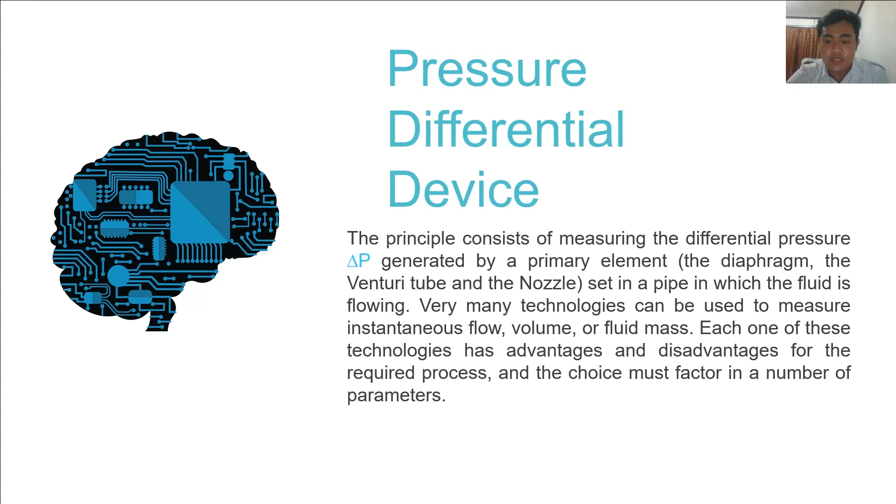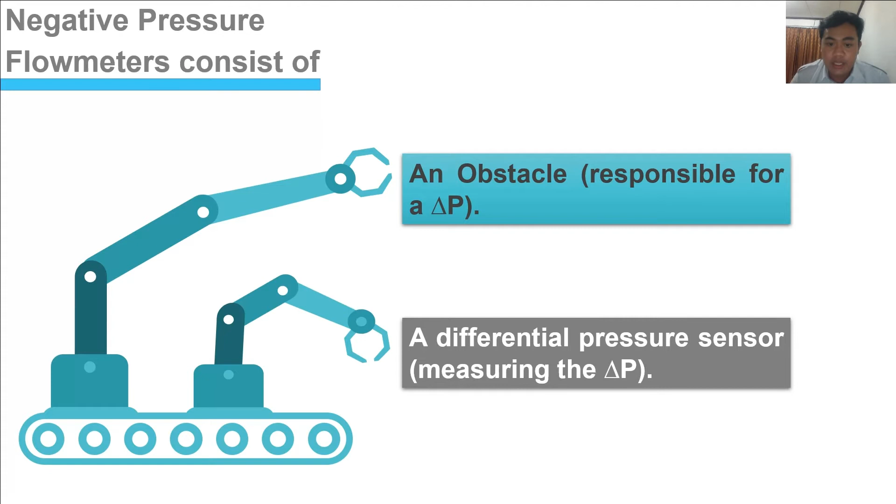A differential pressure flow meter consists of two: an obstacle responsible for delta P and a differential pressure sensor measuring the delta P. This is the advantage and disadvantage of a pressure differential device. They do not require calibration as long as they have been designed in compliance with the established standard, and they have no moving parts, and therefore they remain reliable over time.

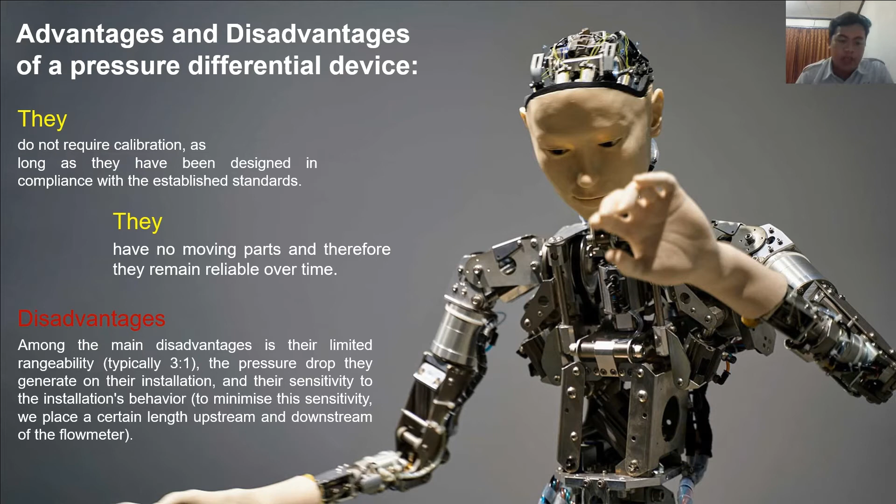Among the main disadvantages are their limited rangeability, the pressure drop they generate on their installation, and their sensitivity to the installation behavior. To minimize this sensitivity, we place a certain length upstream and downstream of the flow meter.

Okay, for the ISO 5167-1 standard: whereas in the United States the most commonly used standard for this type of calculation is the API 2530 standard, in Europe the reference is the ISO 5167-1 standard. The standard specifies the geometry and operating conditions of the different pressure differential devices and also gives information on calculating the flow rate and the associated uncertainties. The standard pressure differential devices are the straight edge orifice plate, nozzle, and venturi tube.

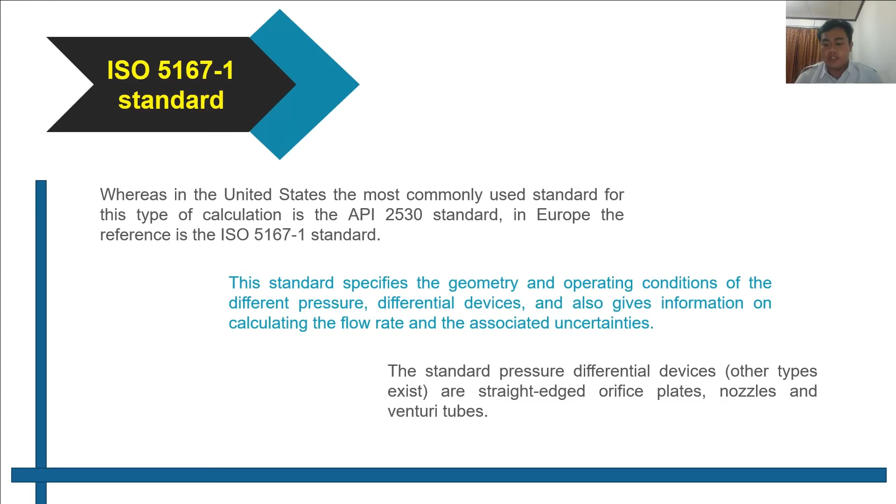Flow rate calculation formula for a pressure differential device: a discharge coefficient C, which corrects the error due to the pressure drop introduced by the pressure differential device. The coefficient depends on the Reynolds number. For example, for a venturi C is 0.97 to 0.99, whereas for an orifice plate C equals 0.6; it is given precisely by the 5167-1 standard.

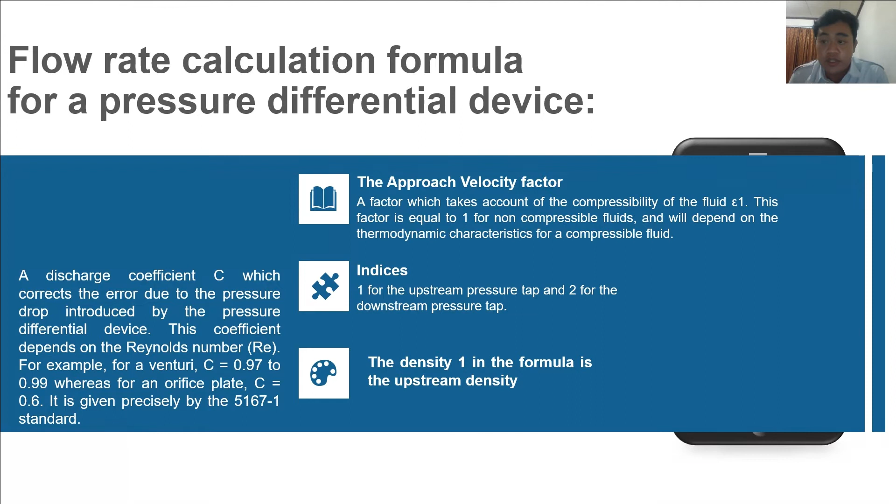The approach velocity factor, a factor which takes account of the compressibility of the fluid. This factor is equal to 1 for non-compressible fluid and will depend on the thermodynamic characteristics for a compressible fluid. Index 1 indicates the upstream pressure tap and 2 the downstream pressure tap. Okay, next.

This is the pitot tube. Pitot tubes, named after Henri Pitot in 1732, measure a fluid velocity by converting the kinetic energy of the flow into potential energy. The conversion takes place at the stagnation point located at the pitot tube entrance. A pressure higher than the free stream pressure results from the kinetic to potential conversion. The static pressure is measured by comparing it to the flow dynamic pressure with a differential manometer.

Pitot tube probes, also called pitot tubes, are used to determine local velocity by measuring the difference between the dynamic pressure and the static pressure. How does a pitot tube work? A pitot tube can be considered as a small cylinder which is placed in a way that fluid can enter, so it will be opposite to the fluid flow. Its one end is open and the other end is closed.

Because of this, the fluid that enters won't be able to flow further and it will come to a static position. The diaphragm inside the pitot tube will separate the static fluid pressure from the total system pressure. The difference between these two measurements is the fluid flow rate. A pitot static tube is a flow velocity meter and it is capable of measuring fluid velocity at a localized point. The energy conversion takes place at the stagnation point.

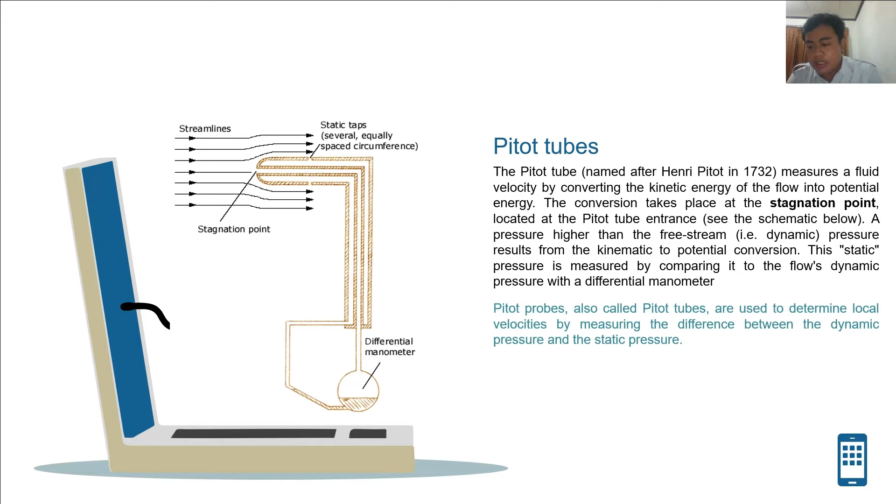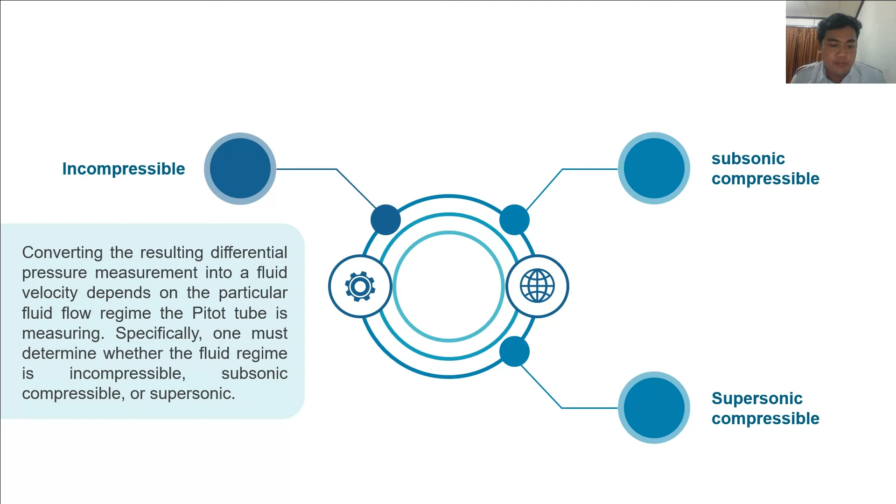Okay. The next, converting the resulting differential pressure measurement into a fluid velocity depends on the particular fluid flow regime the pitot tube is measuring. Specifically, we must determine whether the fluid regime is incompressible, subsonic compressible, or supersonic compressible.

Incompressible: a flow can be considered incompressible if its velocity is less than 30% of the sonic velocity. For such a fluid, the Bernoulli equation describes the relation between the velocity and pressure along the streamline.

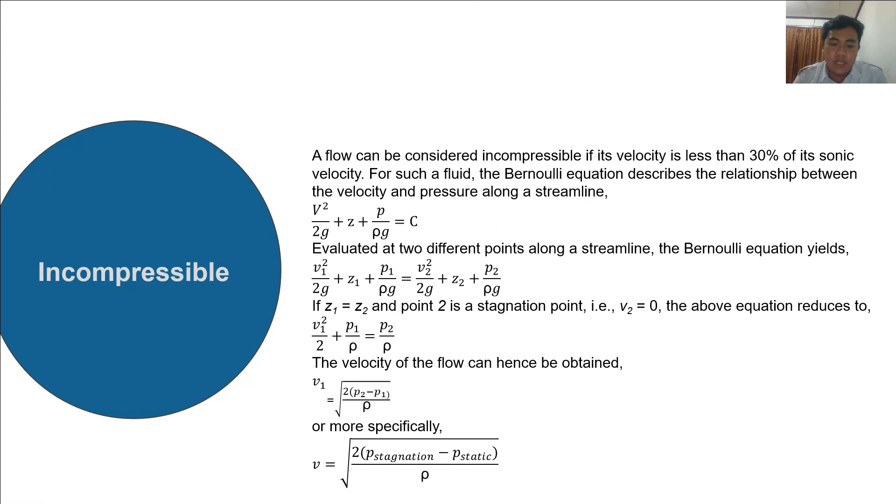Subsonic compressible. For flow velocity greater than 30% of the sonic velocity, the fluid must be treated as compressible in compressible flow theory. One must work with the Mach number M, defined as the ratio of the flow velocity to the sonic velocity. When a pitot tube is exposed to a subsonic compressible flow, fluid traveling along the streamline that ends on the pitot tube stagnation point is continuously compressed.

If we assume that the flow is decelerated and compressed from the free stream state isentropically, the velocity pressure relation for the pitot tube is:

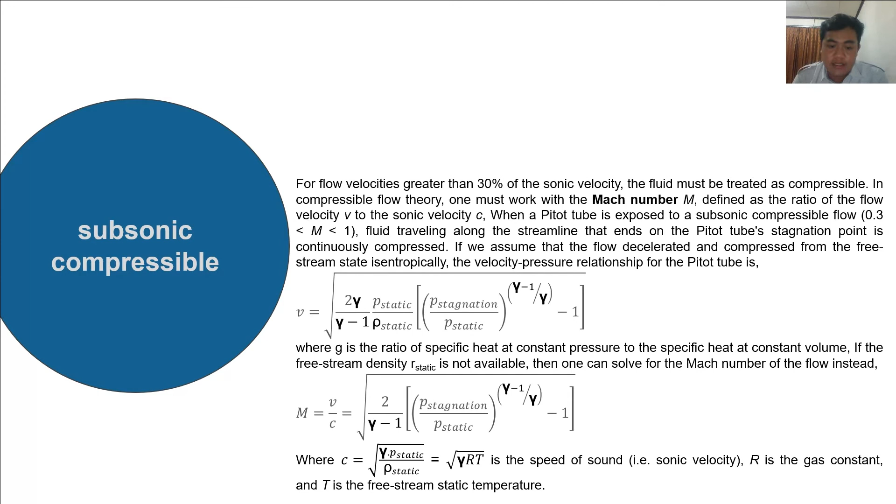Where gamma is the ratio of specific heat at constant pressure to the specific heat at constant volume. If the free stream density rho static is not available, then one can solve for the Mach number of the flow instead, where c, the square root of gamma P static per rho static, equal to the square root of gamma RT, is the speed of sound, R is the gas constant, and T is the free stream static temperature.

Then for supersonic compressible, for supersonic flow M greater than 1, the streamline terminating at the pitot tube stagnation point crosses the bow shock in front of the pitot tube. Fluid traveling along the streamline is first decelerated non-isentropically to a subsonic speed and then decelerated isentropically to zero velocity at the stagnation point.

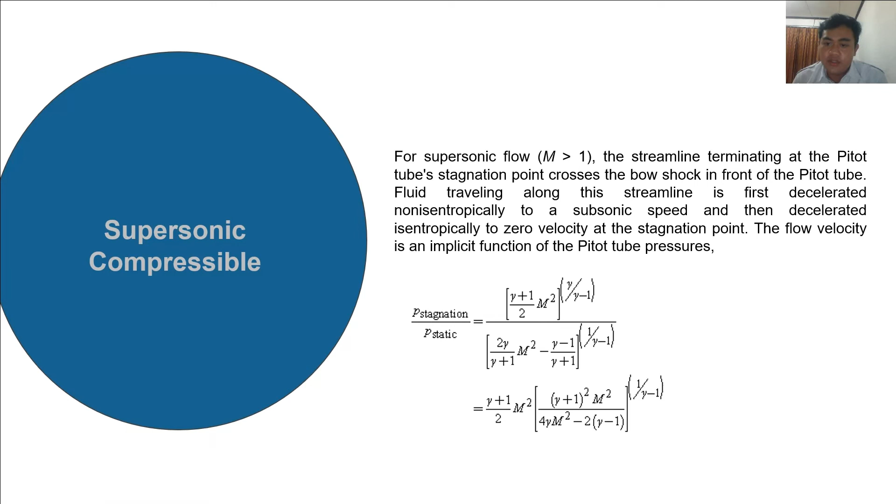The flow velocity is an implicit function of the pitot tube pressure. This is the formula. Okay, and this is the example of the pitot tube and of the Annubar probe.

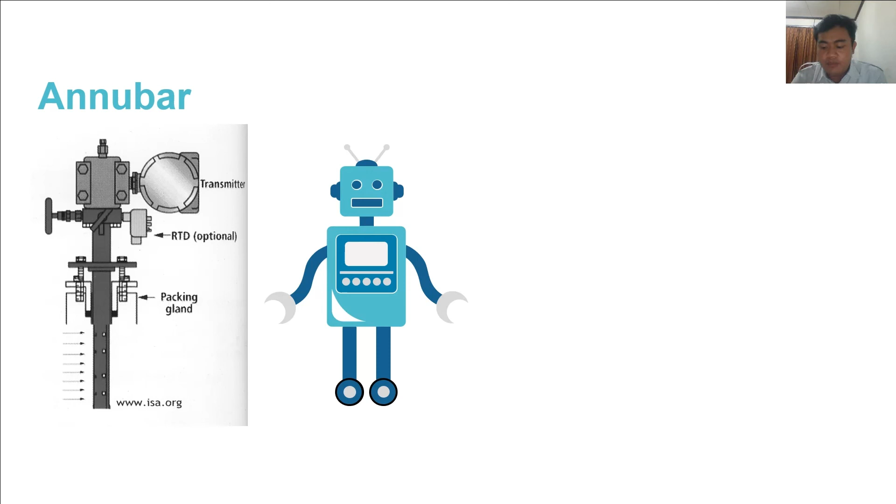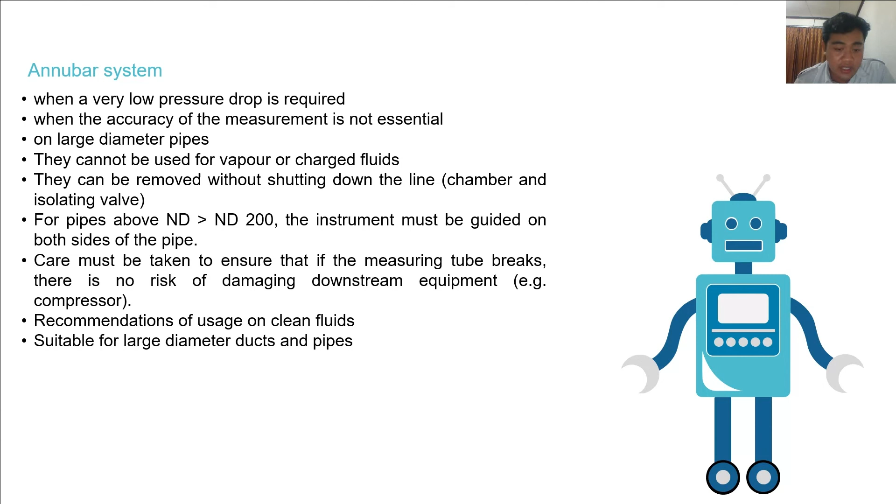Annubar system. When a very low pressure drop is required, when the accuracy of the measurement is not essential, on large diameter pipes, they cannot be used for vapor or charged fluid. Then they can be removed without shutting down the line. For pipes above ND 200, the instrument must be guided on both sides of the pipe. Recommended for usage on clean fluid, suitable for large diameter ducts and pipes.

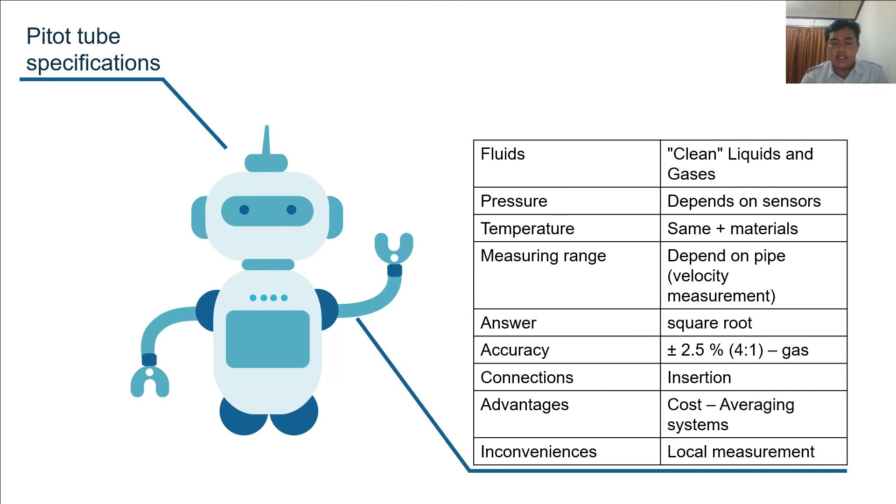And this is the specification of the pitot tube. There is fluid, pressure, temperature, measuring range, accuracy, connection, advantage, inconvenience. Okay, and then pressure differential device. Pressure transmitter. It must be associated with the pressure differential device. It is recommended that the measuring chamber on the HP and LP side should be equipped with isolating valves or with a 5-way manifold so you can easily check the transmitter zero setting.

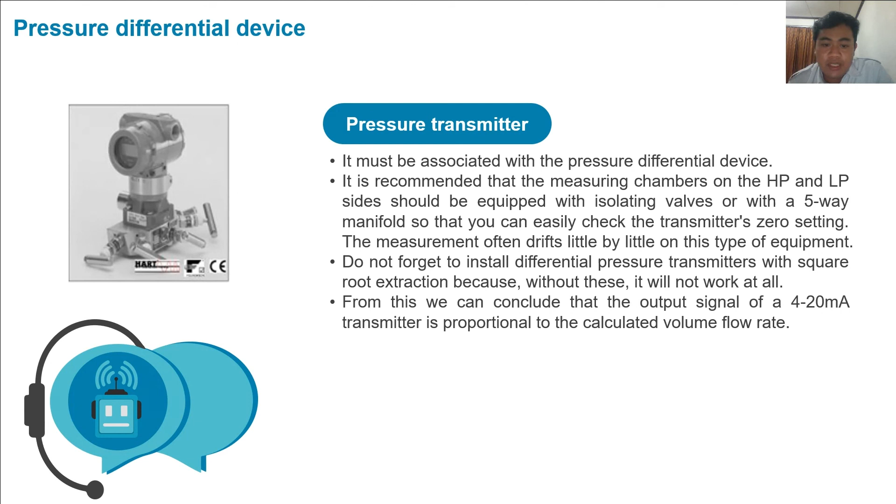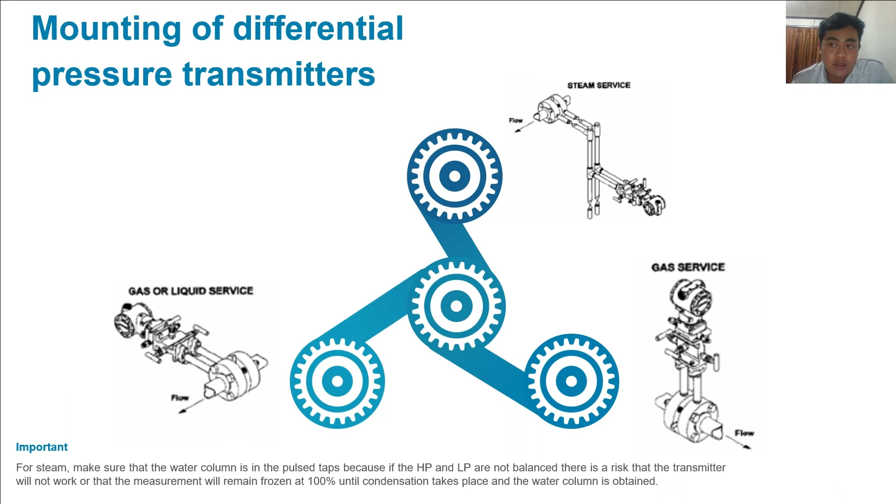Important for steam, make sure that the water column is in the pulse taps, because if HP and LP are not balanced, there is a risk that the transmitter will not work, that the measurement will remain frozen at 100% until condensation takes place and the water column is obtained.